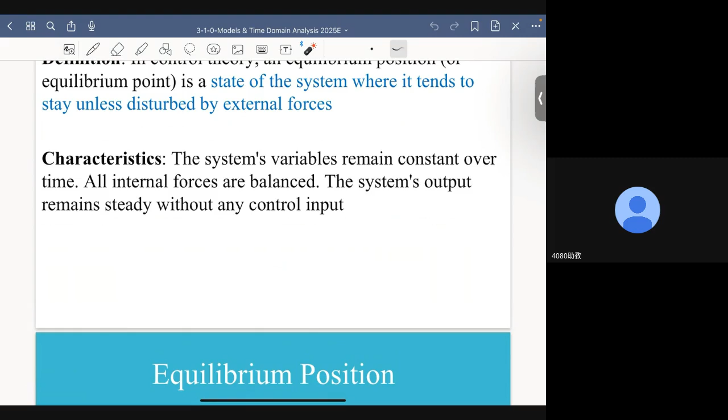So bear this message in mind, and hopefully you think it is worthwhile for you to work harder for this exam, for grades, but more importantly, for what you can learn from this class.

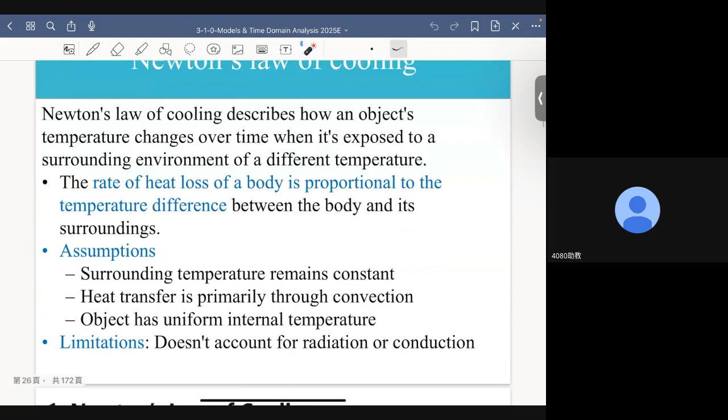All right, let's go back to Newton's law of cooling. This is the first-order differential equation we set up based on Newton's law of cooling. From a control perspective, we chose the temperature T as the output variable, while the surrounding temperature TA is the input. With such an arrangement, this differential equation can be rewritten as this. So apparently, this is a first-order linear time-invariant system in continuous time, and we can simplify it as this.

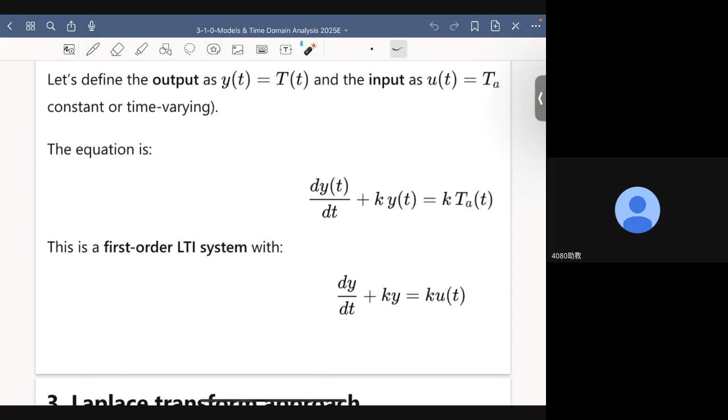Next, we want to solve this differential equation. Here we want to use the Laplace transform. Why? Because by using the Laplace transform, we can easily distinguish the zero-input response from the zero-state response. Let's assume the initial condition is T0. Taking the Laplace transform of this term, I have this. Taking the Laplace transform of this term, I have this. Similarly, for the right-hand side, the s-domain representation is k times U.

Now remember, my goal here is to find the response of the temperature. Therefore, I need to solve for Y. After rearranging terms, this equality can be written as this. After solving for Y, this is what we have. Here it is very clear: this is the part of the zero-input response. Why? Because the input is here.

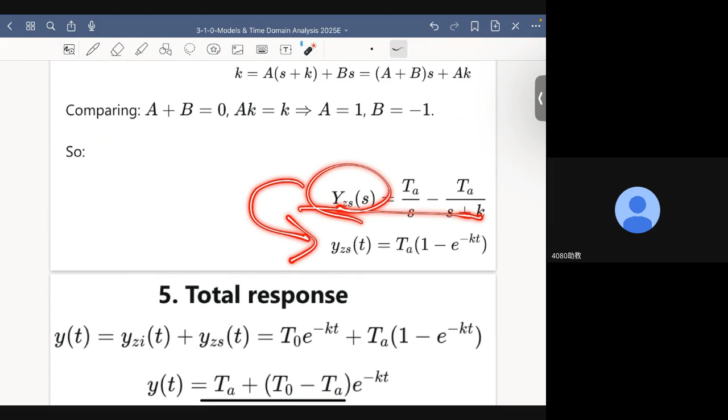Once we have the values of a and b, we have the solution for the zero state response in the s-domain. By using the Laplace transform table, we note the inverse Laplace transforms of these two terms to be TA and TA times e to minus kt respectively. So the total response is the sum of the zero input response and zero state response. This is the zero input response. This is the zero state response.

Now this part comes from, again, the initial conditions, the initial temperature, and this part comes from the surrounding environment. No wonder this is what we call zero input response, and this is what we call zero state response. Now we can simplify this representation by collecting common terms. This term and this term have a common term, e to minus kt, so this result can be rewritten as this.

Once we have such a representation, we know that this part is what we call natural response, because it is determined by the pole of the system; it is made of the mode of the system. The remaining part is what we call forced response. Remember that forced response is the result of the input, but it is not the total consequence of the input, because the total response due to the input is actually this, not just this.

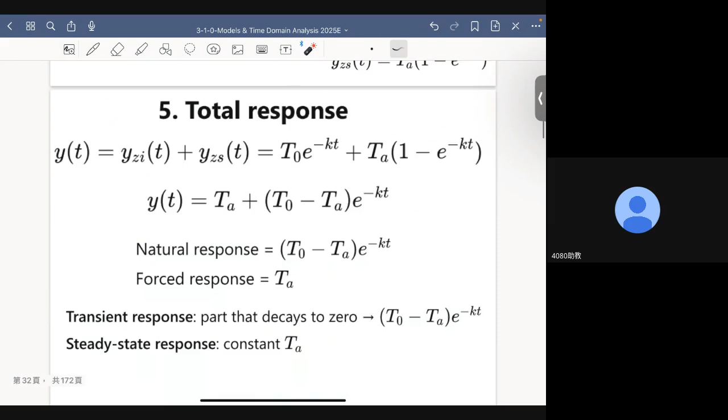Now, with T0 to be 0 and TA to be 100, this result can be rewritten as this. T0 is 0, so this goes away. What we have is this term and this term, and this is what we have. Now, the time constant in this case is defined as 1 over K. Remember, K is what we call the cooling coefficient.

Let me go back to the definition of the cooling coefficient. What is the cooling coefficient? It is a very important parameter for the process of Newton's law of cooling. Based on Newton's law of cooling, heat loss is proportional to the temperature difference. But there is a constant of proportionality, and that constant of proportionality is k.

That means the larger k is, the faster the cooling process is. If k is larger, this derivative is larger, therefore the faster the cooling process. Now, tau is actually 1 over k. By defining tau as 1 over k, this representation can be rewritten as this. Now, let's assume this so-called tau, which is defined as the time constant of this system, to be 5 minutes.

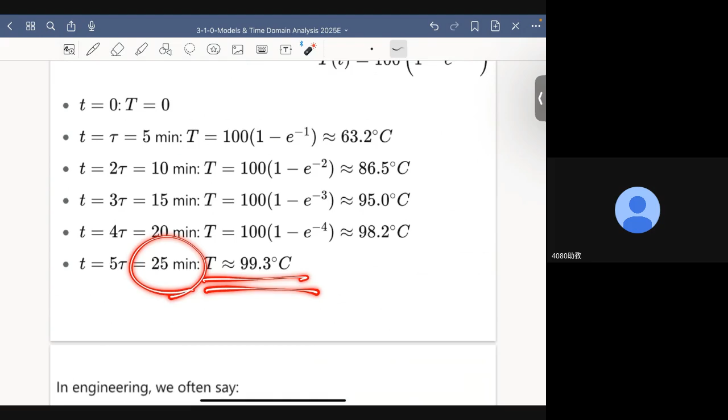So if tau is larger, then the time required to settle down is longer, okay? Let's say tau is 5 minutes, then it will take the system 25 minutes to go from 0 degrees to 99.3 degrees. But if my time constant is now 1 minute, then it will only take 5 minutes for the temperature of the system to reach 99.3 degrees Celsius. Okay, 25 versus 5.

Okay, the only difference is that for this part, tau is equal to 5, and for the other part, tau is equal to 1. So tau actually characterizes the speed of response of the system. That is the reason why we call tau the time constant of a first order system. All right. So let's put it in written text.

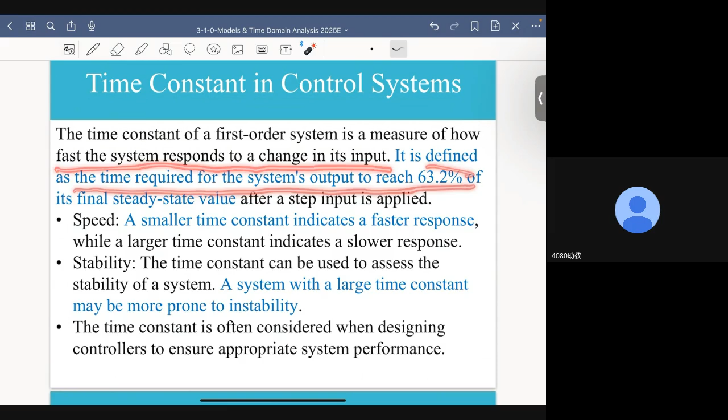Time constant in control systems. The time constant of a first order system is a measure of how fast the system responds to a change in its input. It is defined as the time required for the system output to reach 63.2% of its steady state value. Okay, right? One time constant accomplishes 63% of the steady state response.

Now speed. A smaller time constant indicates faster response. By contrast, a larger time constant indicates a slow response. So the time constant is a very good measure of the speed of response of the system. A system with a large time constant may be more prone to instability. Keep this in mind. I cannot prove it now, but I can tell you why. Why is this the case?

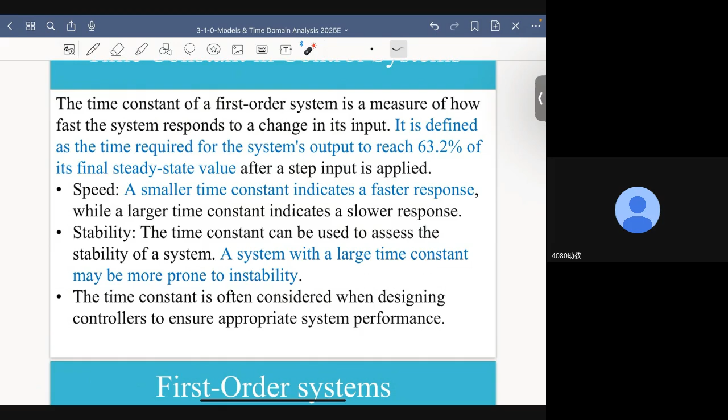Because a larger time constant means a slower system. A slower system might not be fast enough to react to changes, okay? It cannot perform necessary correction to the system output in time because it is simply too slow. So to put it in perspective, a man really has to react to difficult situations fast enough. Otherwise, before I can put anything in motion, the thing's already gone out of control. So the speed of response has everything to do with the stability of the system. Larger time constant, slower response, and therefore worse stability.

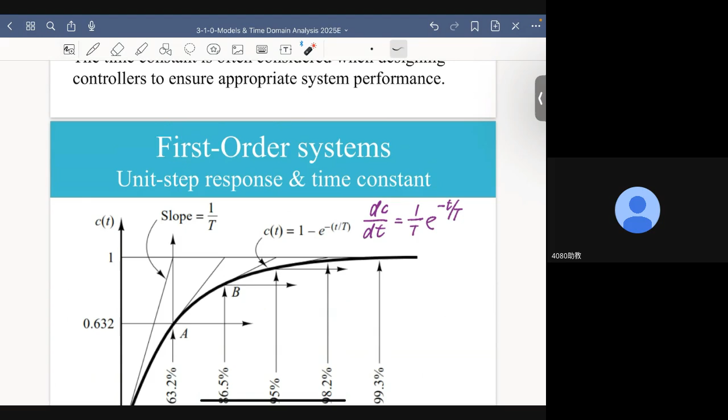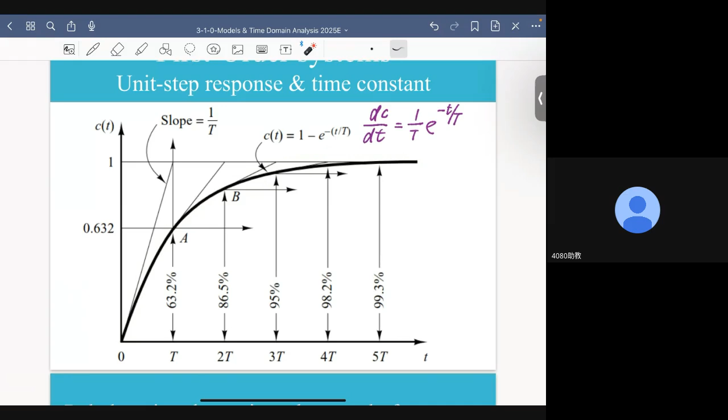Now this is a figure to show you what the response curve looks like. Here I want to emphasize one thing. From this result, you will see the response curve is actually made of an exponential function. This is an exponential function. This is an important result. Why is it an important result?

Because when we first learn exponential functions, I think you probably had the same question as I had. I don't know why I need to deal with an exponential function such as this, because I don't see exponential functions when I go to the supermarket for shopping. I don't need an exponential function when I receive my paycheck. I don't see it in my daily life.

But here, it tells you that Newton's law of cooling describes a very common natural phenomenon, which we probably encounter every day, right? Cooling, heating. We see that all the time. And if you want to describe how the temperature changes with time during this process of cooling or heating, you need to use an exponential function because that's how the world operates.

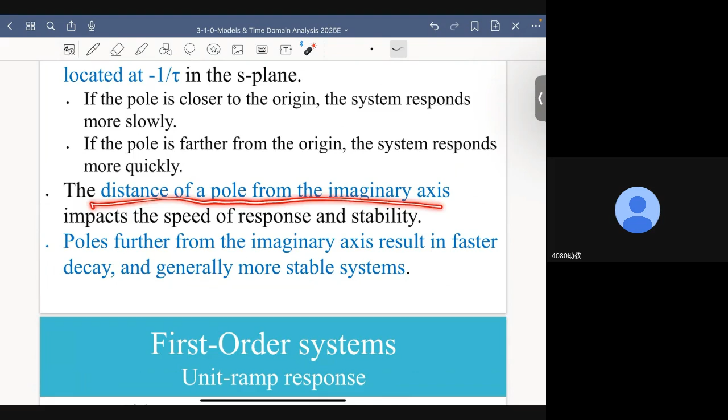So the distance of the pole from the imaginary axis impacts the speed of response and stability. Poles further away from the imaginary axis result in faster decay and generally more stable systems. Keep that in mind, because if we know this is the truth, then in designing a control system, we know where to locate the poles, and that becomes a guideline for controller design.

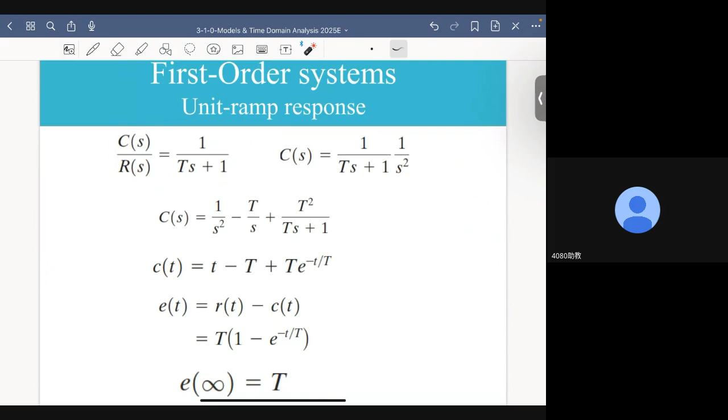Now let's see the impact of the location of the pole on the speed of response, as well as the steady state error of a first order system. Again, this is the first order system under consideration, represented by a transfer function 1 over Ts plus 1. This T is actually tau, the time constant, because in this case, the pole is located at minus 1 over tau.

Now, what we want to study is the unit ramp response, which means my input r(t) is actually t, a ramp function. And the Laplace transform of t is 1 over s squared. Therefore, the unit ramp response for this first order system is 1 over Ts plus 1 times 1 over s squared.

Now, this term can be written as this. By breaking this term into 3 simpler terms, we can take each of these 3 terms by inverse Laplace transform. And this is therefore the unit ramp response for this first order system. Let's now study the error.

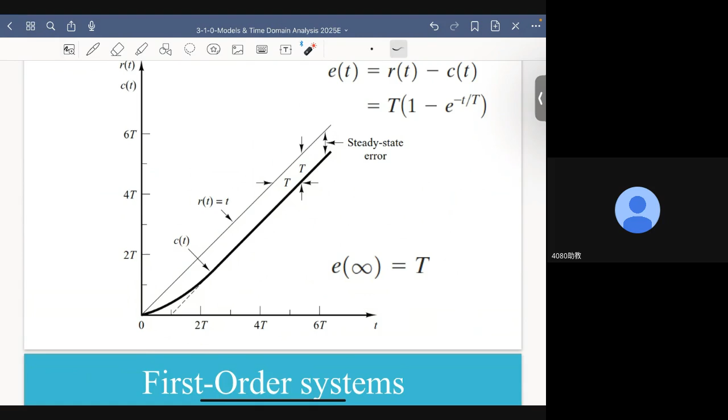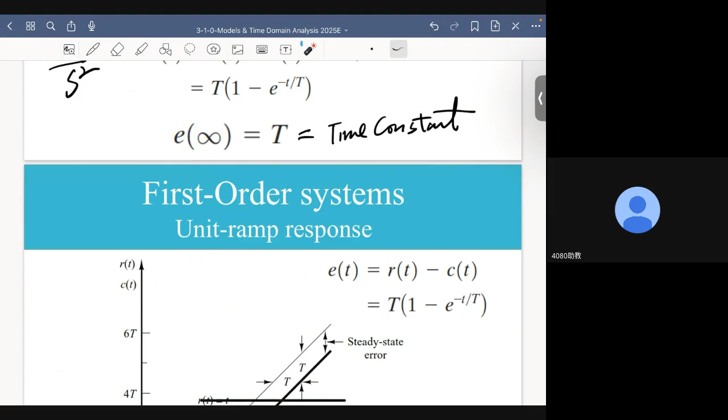And the important thing is, for the unit ramp response of the first order system, this steady state error is actually the time constant of the system. And this should tell you that speed of response of the system really is important. It really matters if you really want to have a system of fast speed of response, okay?

Once I know the time constant of the system, I know everything about this first order system, because a first order system only has one unknown parameter, that is the time constant. With time constant known, I know where the pole is. I know the impulse response. I know its step response. I know its zero input response. I know its zero state response. I know everything. All right? Provided that initial conditions are also given.

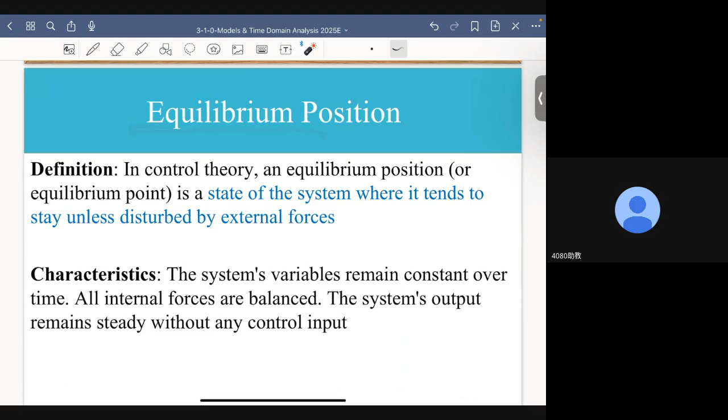And then we'll study simple harmonic motion, which I believe you have learned before in your high school physics course. And we'll talk about one of the very important parameters for the second order system, which is natural frequency. Now, before doing that, let's talk about the idea of equilibrium positions. Let me give you an example first.

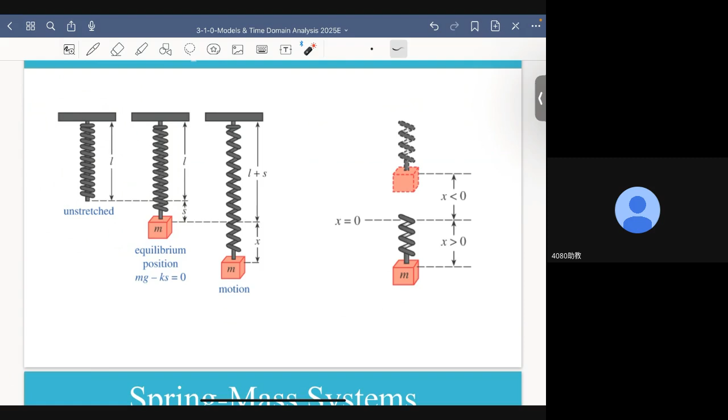Let's say this is a spring. Originally, when unstretched, the length of the spring is L. Now, let's attach a mass to the spring. Hook it up, okay? And due to the gravitational force, the length of the spring will extend, and the amount of deformation, let's say, is S. Apparently, mg is equal to Ks. K, of course, is the spring constant, or the stiffness of this spring, all right?

So, in this particular equilibrium position, the gravitational force has been balanced by the spring force. And therefore, this position is what we call the equilibrium position. And then we will set up a coordinate system to describe the displacement, to describe the movement of this mass.

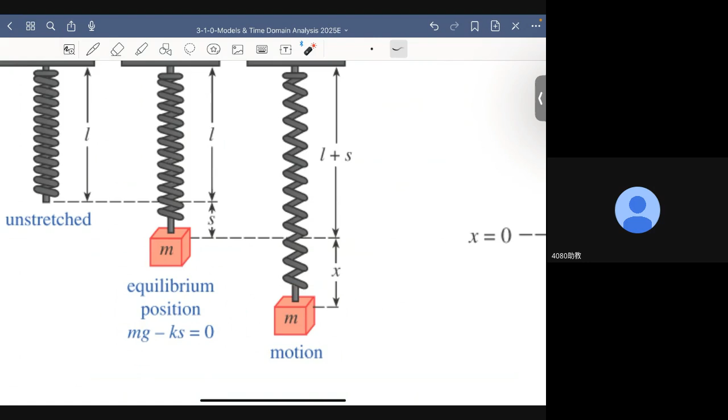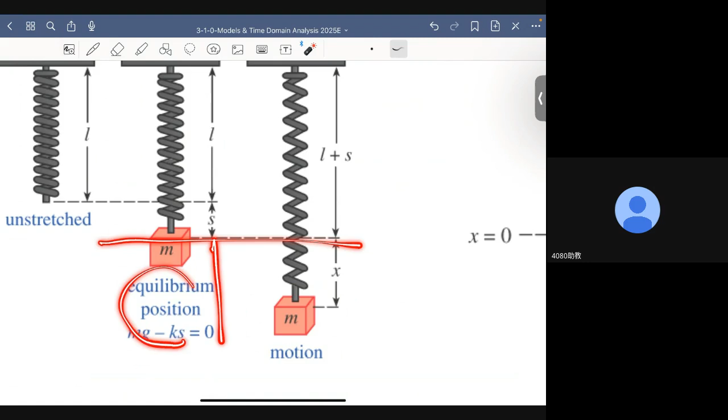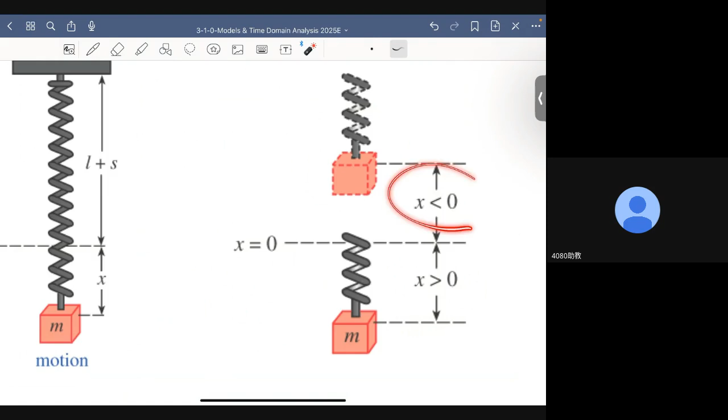Now, for this 1D coordinate system, we need to specify two things. First, the origin. Second, the direction. The origin apparently is chosen as this equilibrium position. So this position is set up as x equal to 0. And we assume the downward direction, that is when the spring is stretched, is the positive direction. By contrast, when the spring is compressed, the mass is moved in the negative direction. So that is how we set up our coordinate system for the spring mass system.

Remember that the origin of the spring mass system is located at the equilibrium position, which is defined as the state of the system where it tends to stay unless disturbed by external force, okay?

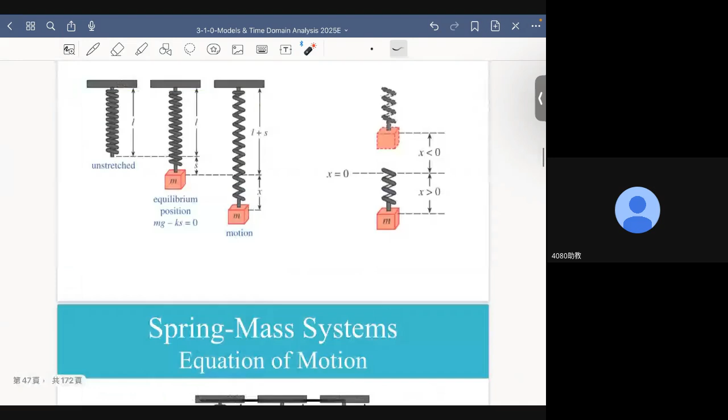So once you attach the mass to the spring, the spring will have some deformation, and once it comes to the equilibrium position, it will stay there forever, okay? Now, here, we want to set up the equation of motion for this spring mass system. Okay, again, let's apply

Newton mechanics, Newton's laws, which tell you that m times a, of course, the double derivative of x, and summation F should include all the external forces, which include gravitational force and spring force. Since the total deformation is S plus x, the spring force is minus K times the sum of S and x. And since we know that mg equals KS, that is, spring force balances gravitational force, the only external force left is minus Kx.

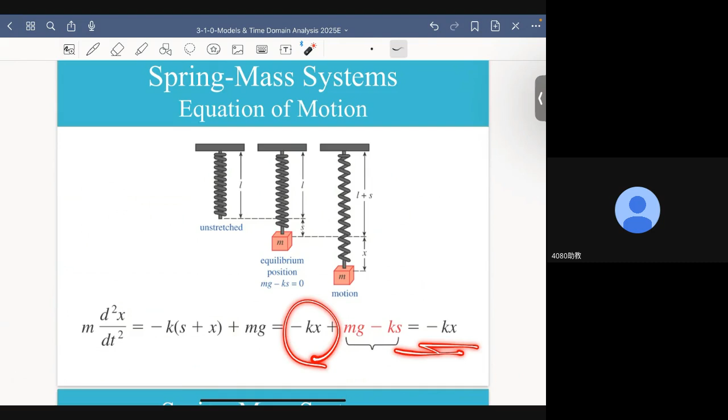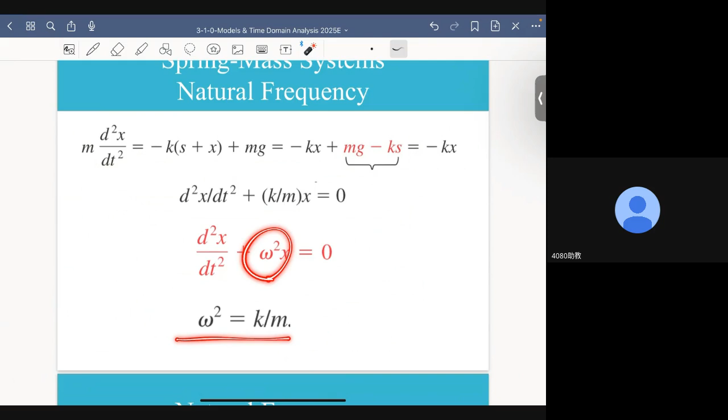Therefore, the equation of motion becomes this, okay? Or I can rewrite it as this. Or I can, again, rewrite it as this, where omega squared is defined as K over M. Remember, K is the spring constant. M is the mass. Another way to look at it is K is the stiffness of the system. And in comparison, M represents the inertia of the system, all right?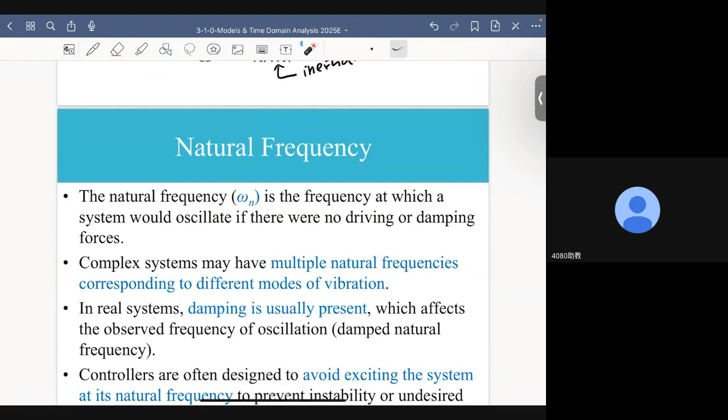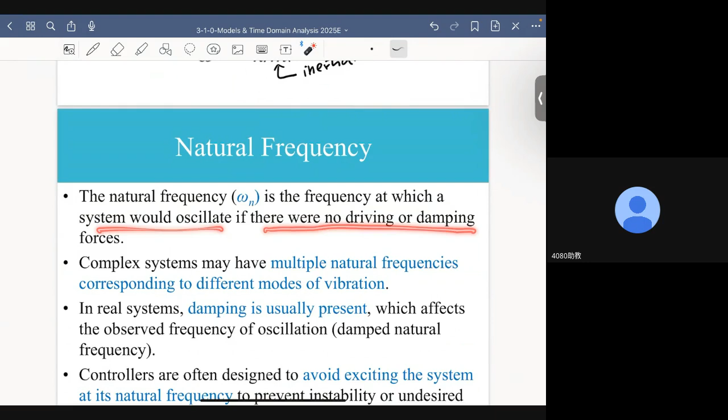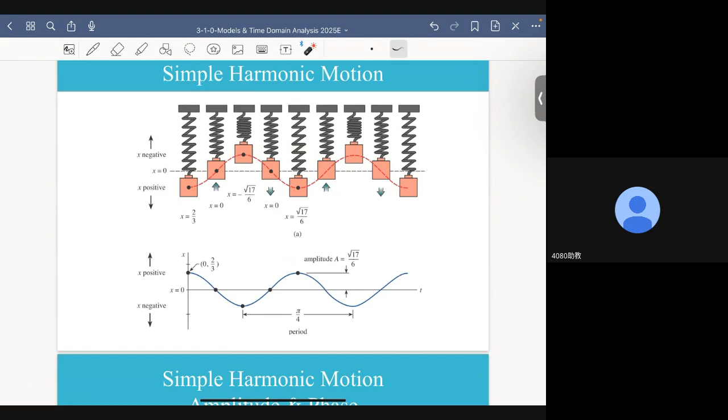Now, omega here is called the natural frequency of this spring mass system. The reason why it is called the natural frequency is that it is the frequency at which a system would oscillate if there were no driving or damping forces. So here we have a spring mass system. If it has an initial velocity or an initial displacement and you release the mass, the mass will oscillate up and down forever. And this kind of motion is what we call simple harmonic motion, right?

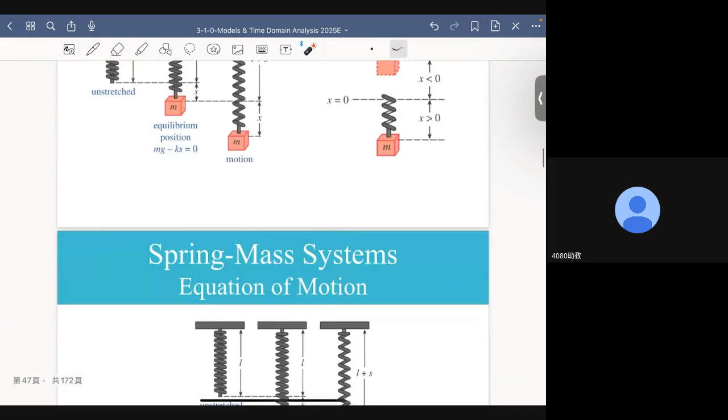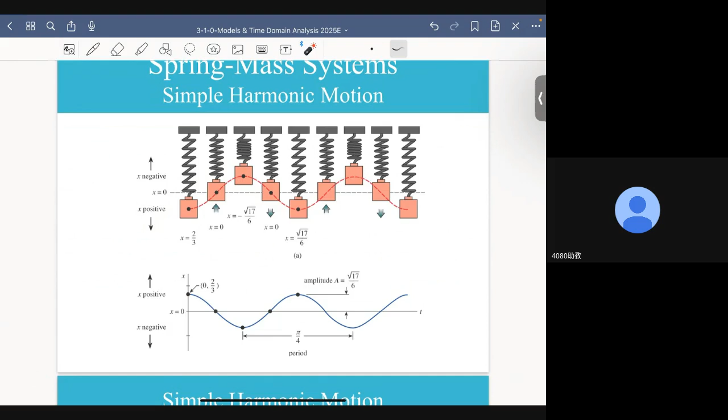And this simple harmonic motion does not just oscillate in an arbitrary manner. It oscillates with a fixed frequency, and that fixed frequency is the natural frequency. All right? Now, the larger the omega is, the faster the oscillation. Now, let's go to the definition of the natural frequency. Here, how do you have a higher rate of oscillation?

Two possibilities. One, you increase stiffness. That makes a lot of sense, because if a spring is soft, you stretch it and release it, it will go up and down, but not in a very rapid fashion. By contrast, if the spring constant is very large, you have a very stiff spring. Once you stretch the spring and release it, it will go up and down very, very fast. So increasing the stiffness will increase the natural frequency.

Now, M, however, acts in exactly the opposite way. Here, what makes the mass go up and down? Of course, here you only have two things. One is spring, another is mass. So the only reason the mass will go up and down is the spring force, right? And the spring force is always proportional to the spring constant. Let's say the spring constant is fixed, and therefore the spring force is also fixed.

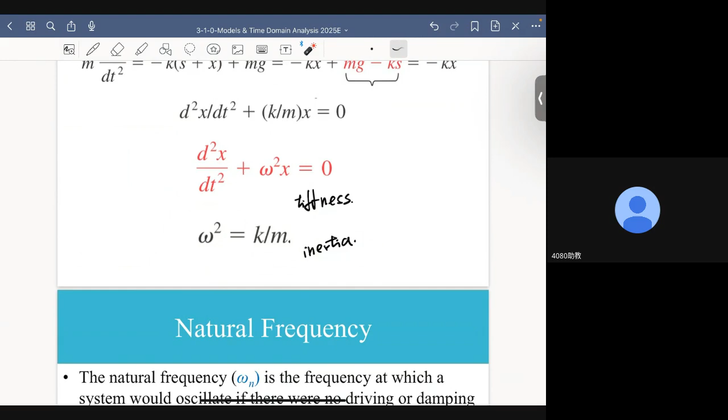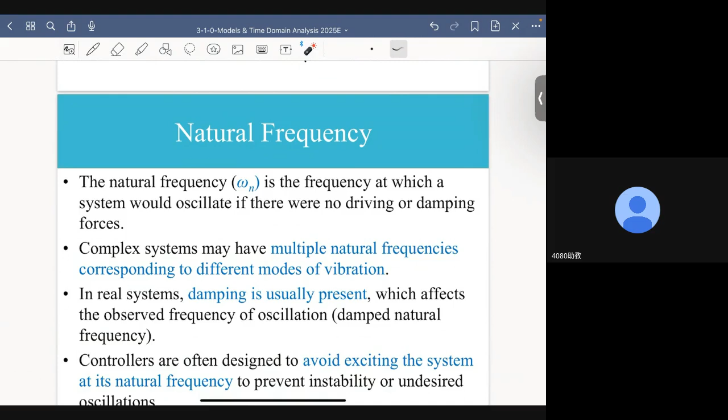So that is the reason why the square of natural frequency is inversely proportional to mass, because the heavier the mass, the more difficult to move the mass. All right, now, a complex system may have multiple natural frequencies. What we have is a spring mass system, which is a second order system. If we have to deal with a higher order system, let's say a fourth order or eighth order system, then the system probably has multiple degrees of freedom, and each may possess its own natural frequency.

And each natural frequency corresponds to different modes of vibration. In real systems, damping is usually present, and damping will affect the observed frequency of oscillation. So there are two kinds of natural frequency. One is what we call undamped natural frequency, the natural frequency of a spring mass system. And we also have damped natural frequency, which takes the damping ratio into consideration.

Okay, now controllers are often designed to avoid exciting the system at its natural frequency. Why? Because we want to avoid resonance, which we will talk about in a few minutes.